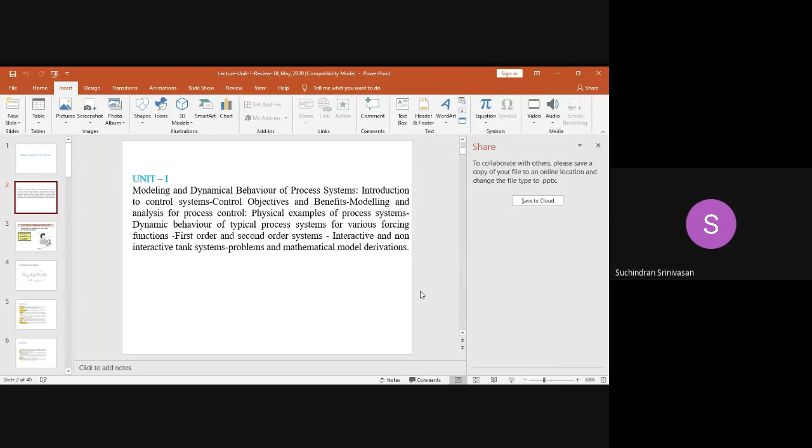So in the initial stage, we designed the mathematical model of a given system. Can you recall some of the mathematical principles we employed in building the mathematical models? So we used the energy balance equation. That's good. And then? Mass balance equations. Energy balance, mass balance equations. Yes, if it's an energy intensive process, we employed the energy balance equation.

If it is mass based systems like a liquid tank level system and all, we employed mass balance equations. So then we arrived at a particular differential equation, I hope you can recall that. Mostly we learned only two different kinds of differential equations: number one is the first order differential equation, number two is the second order differential equation. We didn't learn anything more than that.

So for first order differential equations, we learned thermometer and single tank systems. And for second order differential equations, we learned something like two tanks connected in cascade mode. So that's what we learned. We also studied how to analyze the behavior or response of systems for given input signals. So with that in mind, let us now move ahead and try to understand some basic concepts, starting with what is the feedback system.

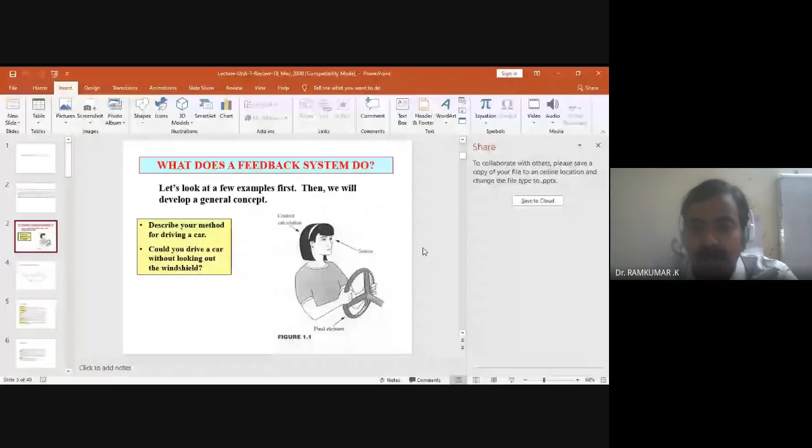And the sensing part is the eyes, and the final control element is going to be the steering wheel, or even the accelerator pedal can also be called a final control element. If you are looking for a velocity-based control mechanism, to control the speed of the vehicle, the accelerator pedal can be the final control element. If you want to move right or left, you rotate the steering wheel accordingly and take appropriate control actions based on the requirements. So it's basically a basic feedback control mechanism that employs a sensor powerfully. The sensing element is so vital here, and with its help only we are going to take appropriate control actions. So that's what we learned.

So if you think about a feedback control system, you can always mathematically put it in the form of a block diagrammatic representation. Most of you already studied a feedback control course last semester, so you're quite familiar with this closed loop feedback control mechanism, wherein you have a process and a measurement point. In this case, the process may be a cruise car, and you are measuring the velocity. Then with the help of a control mechanism, you will be accelerating, decelerating, or applying the brake. So the final control element is something by using which you bring about a change in the process. You are going to influence the present status of the process with the help of the final control element, and the controlled variable is key.

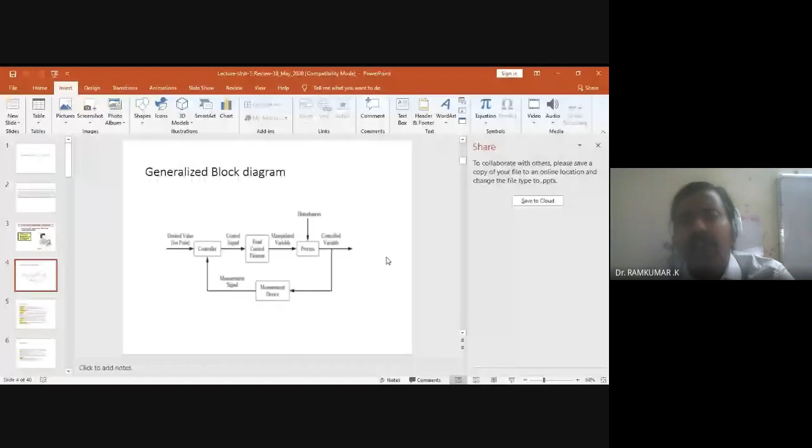For most of you who are going to review the entire subject again, try to concentrate on some basic feedback closed loop diagrams. You can just type in Google 'closed loop case studies or examples' and you will get a lot of real life examples. It may be a cruise car, a flight mechanism, a satellite control, or a very simple heater mechanism or heat exchanger system. You can see a lot of examples on Google. Familiarize yourself with the various kinds of variables I'm talking about here, like if I ask you, what is a controlled variable? What is a manipulated variable?

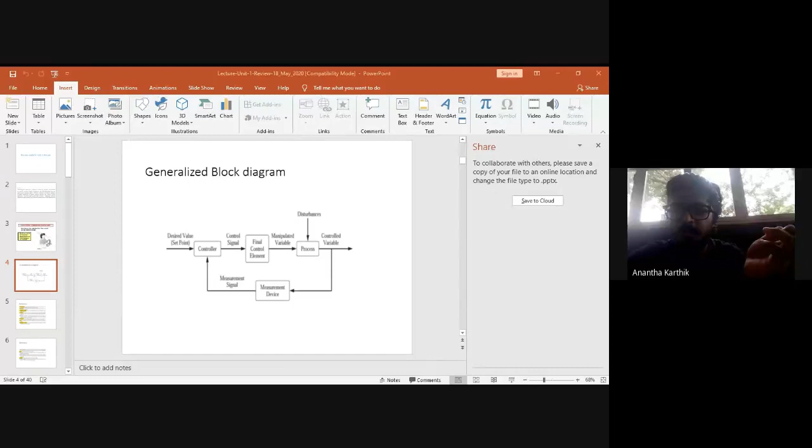It seems some people are unable to join the session. Give me a minute. Totally there are 55, 56 guys joining, still joining. Darshana has left the meeting, ask her to join again. I think most of you are there, 56 guys are there. For some people, the invite link is not working, that's the problem it seems. They need to come to this classroom, which I have already shared. Classroom, I will share that same link in the group. In this classroom, they just have to simply click the ID link I have given. I'll share that link to them. That's not the problem, sir, they are using their normal mail ID in Meet. They have to use SASTRA mail, that is not allowed. They need to come to the SASTRA mail and enter my class. This class I have already given to third year B section. For Praveen also the same problem persisted, but just now he sorted that out.

You guys are getting keen on this online mode, very good, very good, I'm very happy. But what about my audibility and all, is it clear to you all? Yes sir, it's clear sir, the voice is perfectly clear and audible. Okay fine, in between if you have any doubts, you can stop me and raise your doubt.

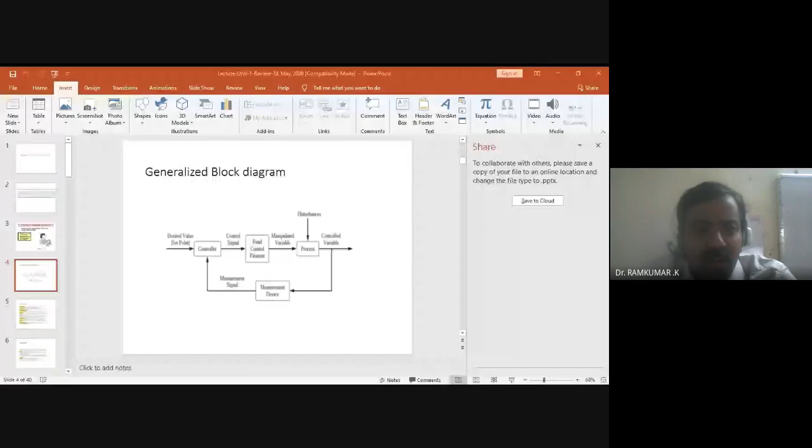So that you'll be in tune with whatever I'm trying to convey to you. At the end of the day, learning is important, so whatever I want to convey, I want to convey, and you should be in a position to give me the required feedback. Otherwise the control systems will not work, so required feedback is essential. So don't interrupt unless you have a genuine doubt, but if you have a doubt, please interrupt. Now, can you see the slides?

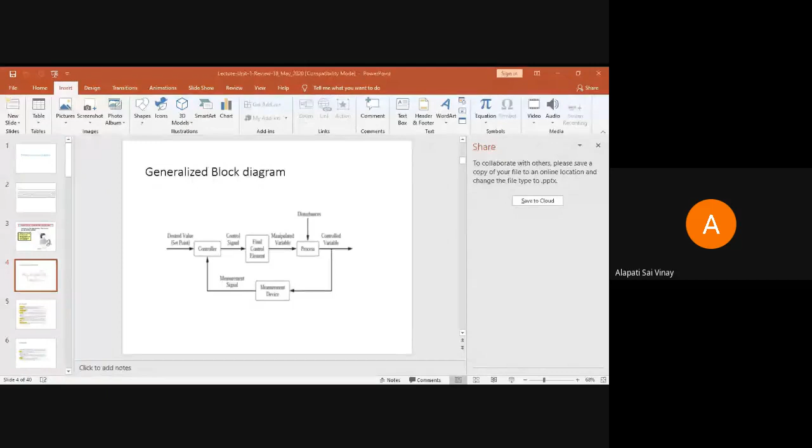For example, if somebody is asking you, what do you mean by disturbances in a system? Can anybody answer? Don't look at the definition there in the slide. Can you give your own answer? What do you understand by the term disturbances? So anything that's hindering the process, or not necessarily a process, anything that's hindering any flow of movement, that's a disturbance. That's right.

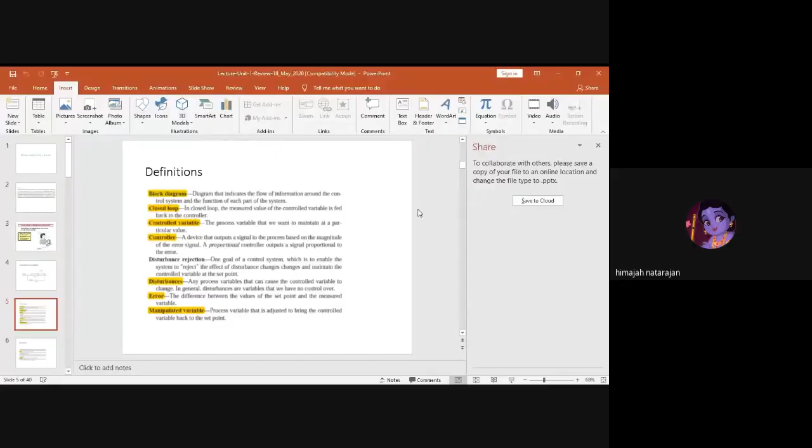For example, you are driving a car. You are accelerating the car. What do you think will be your disturbance? Suchindran? Sir, the wind resistance, the road friction. Yeah, that's right. The road friction, wind resistance, all these. See, for example, when you are accelerating in a very ideal condition, the amount of pressure that you will be exerting on that accelerator pedal, which you would have been trained to do.

So if you are pressing it and it's going at 70 kilometers per hour, suddenly, because of the wind, what happens? For the same amount of pressure you are pressing on that accelerator, the speed may reduce. So in that case, the controller has to take corrective control action so that you'll be pressing it more to get the required speed. 70 kilometers per hour you want to travel, now it has got reduced to 65 because of the wind.

That's a disturbance. So somehow or other, we need to eliminate the effect of disturbances over the system, and a controller should do that effectively. So disturbance elimination is one of the key properties of any control system. Can somebody tell me what are the key control objectives of a system? So one of the major control objectives is safety, sir. As we learned, of the 9 different objectives, safety is one of the major things.

And then we see the feasibility, its production rate, quality, profit. Economic viability, sir. Who is that? Deepak, sir. Quality, yes, very good, profit, economic viability. What do you mean by economic viability, Deepak? So if you're spending a little bit of money on your system, you should be able to have an equivalent output for it. You should not spend too much for a system that you can run in a very cheap amount, sir.

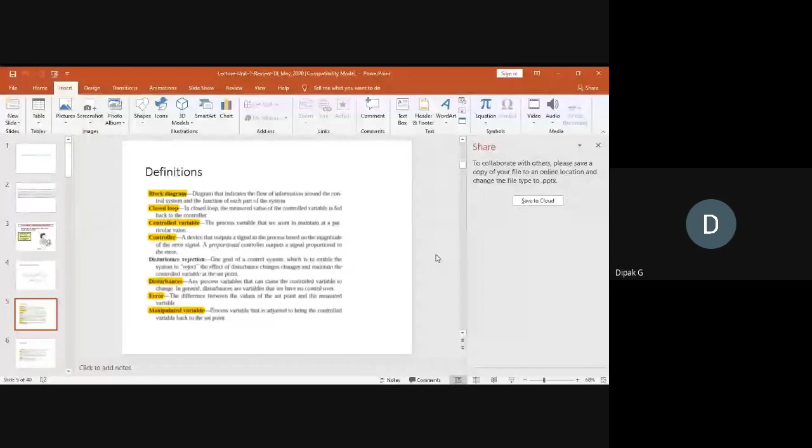Kumar? Dipak refers to the profit, I think, the profit margin, right? Not necessarily, sir. In cases where we have to spend over 100 liters of fuel to burn something, if we are able to do it in 50 liters, we'll be saving fossil fuel as well as money. So both will be working simultaneously. Okay, that's good. Apart from that, the main control objective is the safety requirements, environmental safety as well as equipment safety. That is the primary objective.

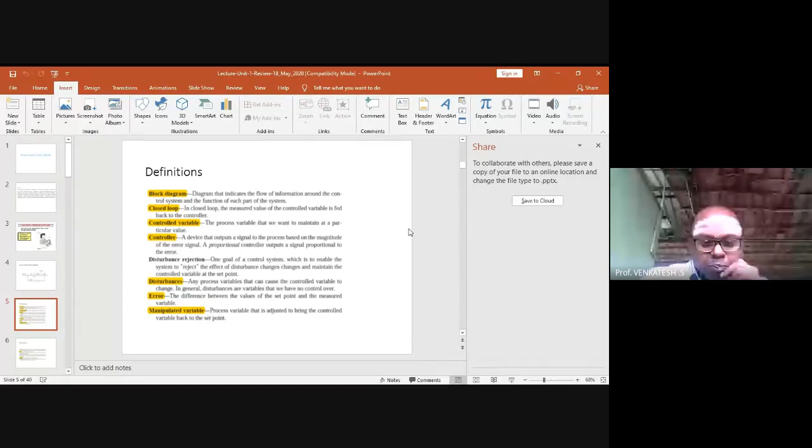Okay, proceed, Ramkumar sir. So some of the key points that you need to keep in mind when you are designing any control mechanism: always ask this fundamental question. What am I trying to control in my process, in my system? What are all the variables that I am interested in controlling? Number one question. Then how do I control that? What are all the various manipulated variables involved, and what are all the other variables involved?

So what particular manipulated variable, if I manipulate it, will have an influence over the controlled variable? That you should be in a position to identify. Along with that, you should keep posing questions like, what kind of set point tracking mechanism am I interested in? Am I interested in tracking my set point in a very perfect manner, or is some kind of error, some kind of tolerance allowed? What about the transient response?

What about the steady state response? So set point tracking is a key problem when it comes to any control mechanism. At the same point, you should also ask the question, what kind of disturbances are acting over my system, and how do I eliminate that with the help of my controller? So disturbance elimination and set point tracking, these two are among the key ideas related to control systems.

Along with that, you should also think about something called stability. Okay, so most of you have studied closed loop systems, transfer functions and all. So you should be in a position to know that by knowing where the closed loop poles are located in the S-plane, you can imagine the kind of stability, the kind of transient response, the kind of steady state response the system can provide. So this idea is quite important.

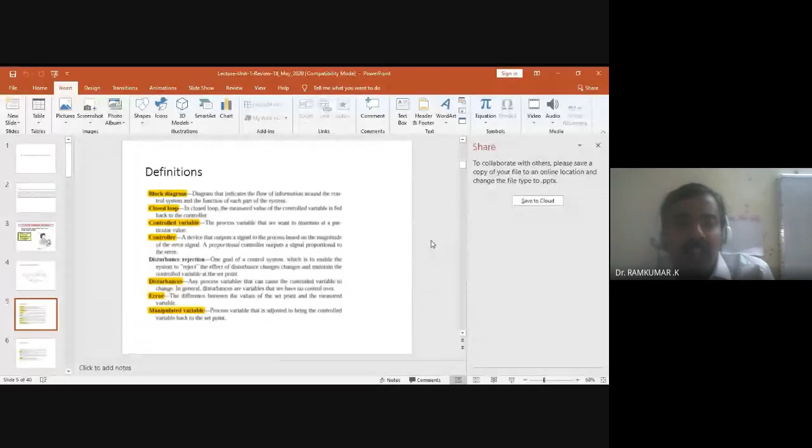So when you go back to your drawing room and learn all these things again, try to spend some time posing these kinds of relevant questions. What about the location of the poles in my system? Are the poles properly located or not? If not, how can I make them move from that particular position? These are all things you should study. So that is the first unit. You should also clearly understand where control is done.

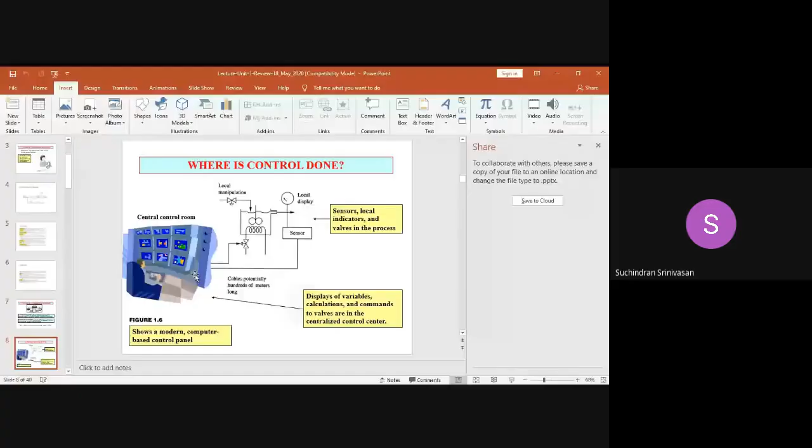And then it's breaking up. Yeah, now it's connected, I think. All right? Yes, all right. Fine. I received a call on my phone, that's why it's getting disconnected. But all right, now I switched it off.

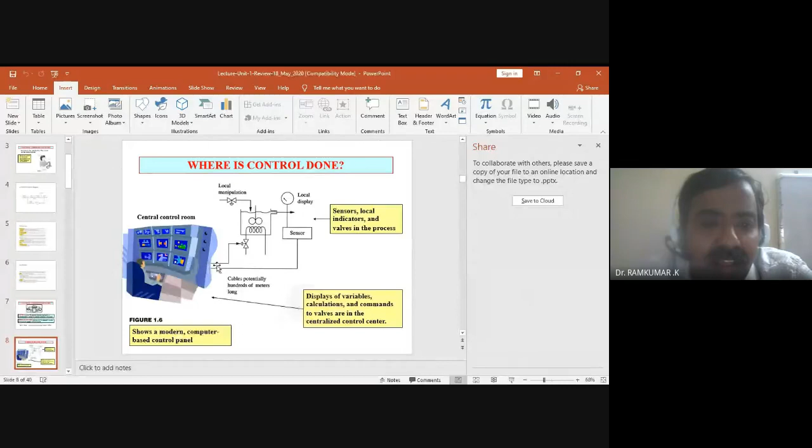So now the central computer will be receiving the sensing signal, and based on this input, the controller has to take an appropriate control action. In the control room there will be computers and PLC-based controllers. Distributed control mechanisms will take a corrective control action, which will be given to a control valve. This control valve will adjust the amount of fuel entering the heating mechanism, and thereby the temperature will be maintained.

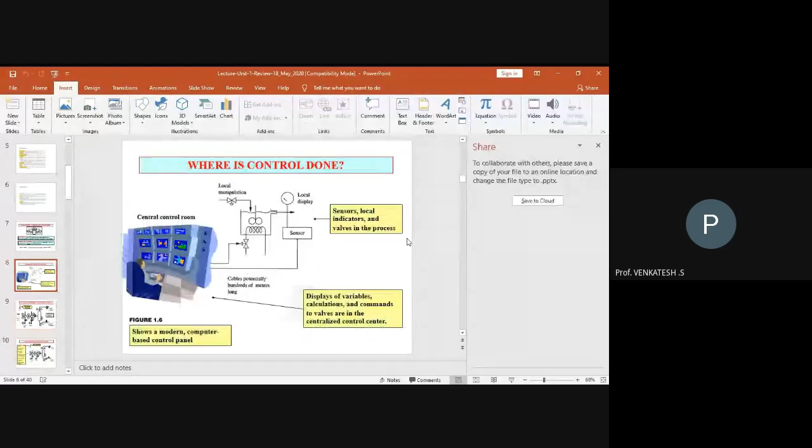Hello, okay. Are you able to hear me? Venkatesh, can you see the slides? Hello, is it audible? Slides are clear to you? Ramkumar, yeah, you are audible to me. Sir, is it audible to you? Can you see the slides? Yes, sir, we can see the slides. Okay, very good. You can hear my voice also. Good.

Okay, so now look at this. We are going to take one simple example to understand the various control objectives: a process called the flash separation process. Can any one of you in this class recall what we learned in this slide?

Venkatesh, you are not hearing me. You mute it, Venkatesh. The rest of them are hearing. You mute it.

Okay, so can any one of you try to explain what the flash separation process is all about? Anybody? Just give it a try. Sir, in the flash separation process, for example, petroleum fuels have boiling points at different temperatures. Excellent. So you can refine multiple different elements by boiling them at separate points, so that when the vapor comes, you can separate them and get the components refined, sir.

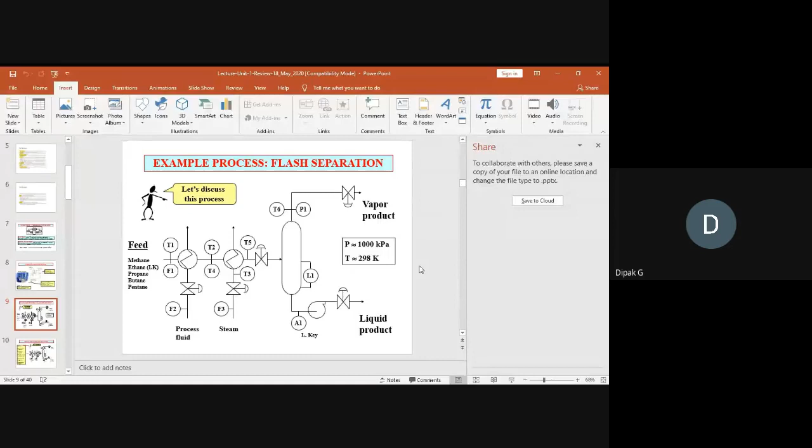Okay, excellent. So as he has mentioned clearly, we have, for example, two different chemicals mixed together, maybe methanol and water. Methanol boils at, let us imagine, 70 degrees centigrade, and water at 100 degrees. So when both come to this point, after two heat exchangers supplying some amount of heat, the one with the lower boiling point, 70 degrees centigrade, is going to boil quickly and evaporate.

And you will be collecting it as a top product. And the higher boiling point stream of the mixture is going to be collected as a bottom product. It's called liquid product, and this is going to be called vapor product. So you're going to maintain some temperature here, and thereby you'll be separating two different kinds of chemicals.

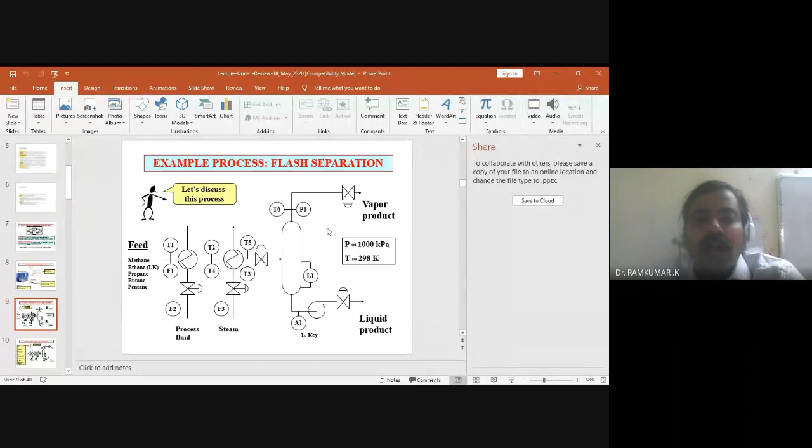So in this process, we are interested in employing the control objectives. So what's the first one? Can you recall this? I hope most of you can recall this. Safety is key. Recently, you might have noticed from the newspaper that in Visakhapatnam there was a big chemical plant disaster. Yes, sir, a gas leak. Yeah, gas leak. So safety is key.

And one more thing, Ramkumar sir. Very recently in our Tamil Nadu NLC thermal power station 2, there was a disaster. Actually, 8 were injured, and later on 1 or 2 died. One of our classmates, Varsha, is residing in Neyveli. She asked me on that day what the reason for that disaster was, whether it was a control system failure or something like that.

And I told her in the class itself that a lot of frequent maintenance is essential. Frequently the plant will be shut down for doing the maintenance. So everything should be done. The control system should be proper. Everything. That may be the reason, I told her.

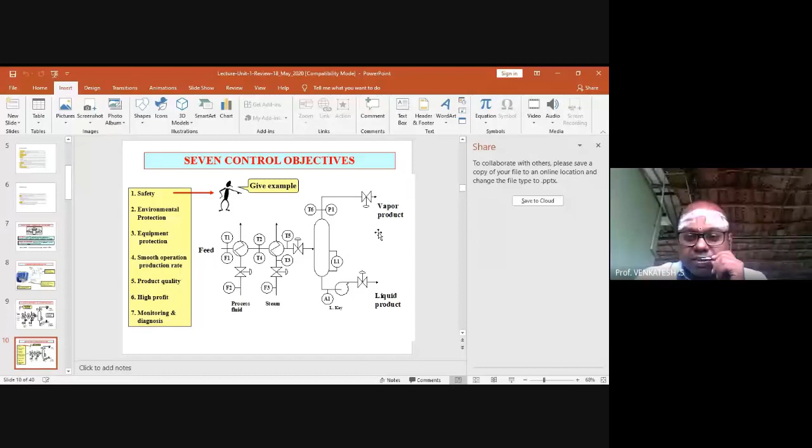Okay. Varsha, are you there? Varsha? Varsha, are you there? Can you just tell me what you have learned? Okay, fine.

So now look at this case. In this case, high pressure in the drum is dangerous. So naturally, we need to measure the pressure in the drum, and with the help of a pressure controller, you'll be controlling this valve, and this valve will be adjusted in such a fashion that the required pressure will be maintained within this system. So the control objective of the pressure controller is very clear. Safety is ensured. So the pressure controller will take care of safety.

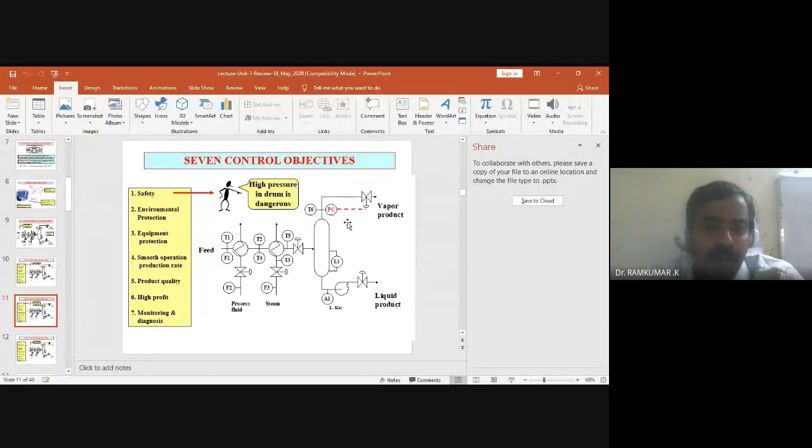What about environmental protection? If you look at this case, there will be some flare emitting some kind of poisonous gases. So somehow we need to maintain the quality of the pollutant that's going to come out of this. So we'll be transferring the gases coming out of this flash separator to some other place where we can separate some of the pollutant from it.

Then you have equipment protection. So how do we ensure equipment protection? Who can tell that? What do you mean by equipment protection in this case? Sir, usually to prevent corrosion, they coat it. They do zinc galvanization, so it can handle high pressure and heat, sir. And sensors are used to make sure it doesn't vary from the parameters.

That's excellent. But the key point is we are thinking of control objectives. What you are saying is a design objective. When the process is being designed, they'll be doing all this coating. But once the process is designed, the next stage is control mechanisms. In this flash separation process, if the level of the bottom product goes down beyond a certain limit, some pump may get damaged. So we need to maintain the level in the bottom product.

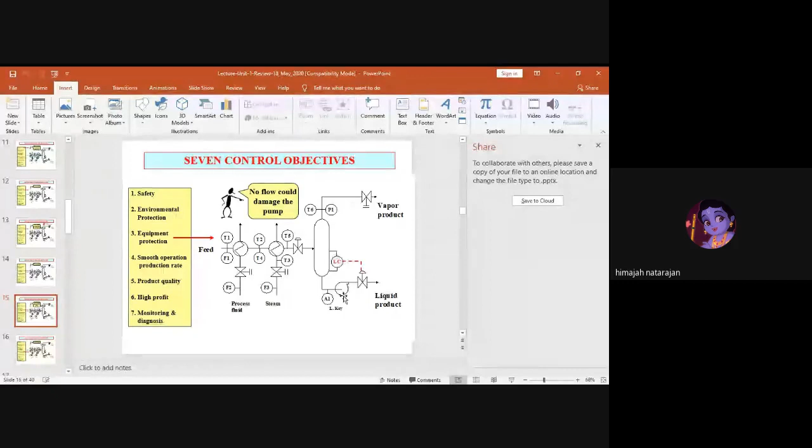Which equipment? Anybody? Equipment in which the liquid is stored. No. The equipment pump. Pump is the key. Okay, the pump will get damaged when you are going to operate it with a very low level. The level is low, there will be the differential pressure. You'll be getting into a problem. There will be a failure. The pump may get damaged completely because of the low level.

So even you can test it in your house also. If you have an overhead tank, when you are going to run the pump without any liquid in the tank, what will happen? It may get damaged. Heat energy will get accumulated over a period of time. Pump may get damaged. So it is essential for you to maintain the level in the tank.

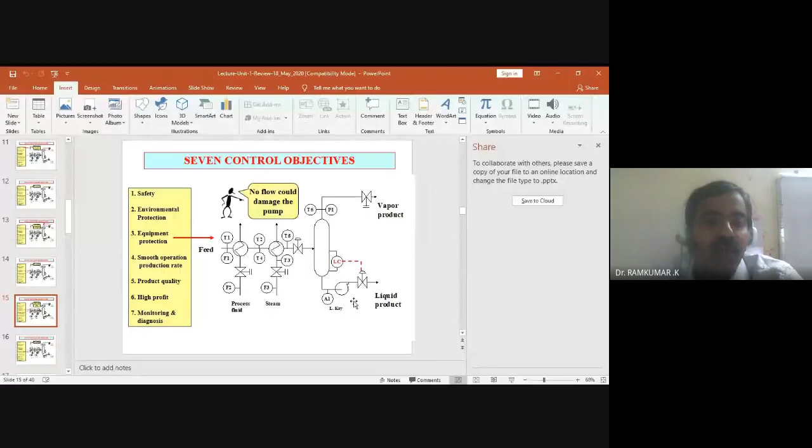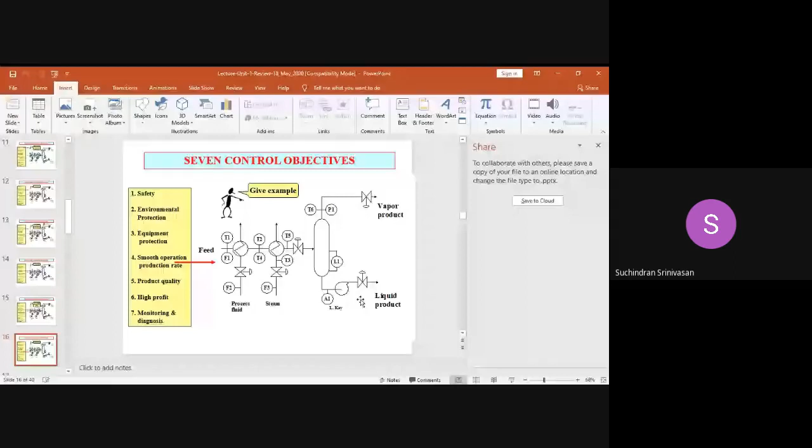So smooth production rate. Can somebody tell me what is smooth operation production rate? Can you recall? Anybody? Just give a try. So the process occurs without any hindrance to it, sir. It just continues in a proper flow. Yeah, smooth. Normally, the final end product is what we are normally interested in.

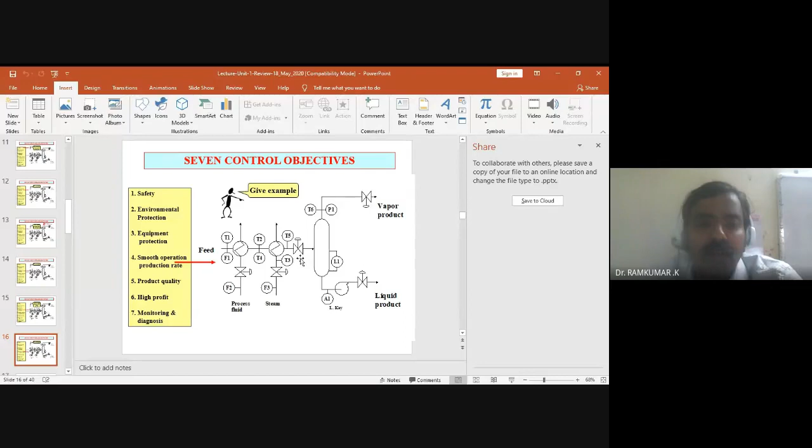Every day, for example, you are producing some 1,000 liters of a vapor product. Imagine. You should maintain it in a very smooth operational manner. The production rate should not get disturbed. So for that, somehow or other, you need to maintain the inlet flow rate. You should keep on feeding the required amount of that combination of chemicals into that separation process in a very continuous manner. That smooth operation should be ensured because you'll be maintaining the flow rate here. The flow rate can be controlled.

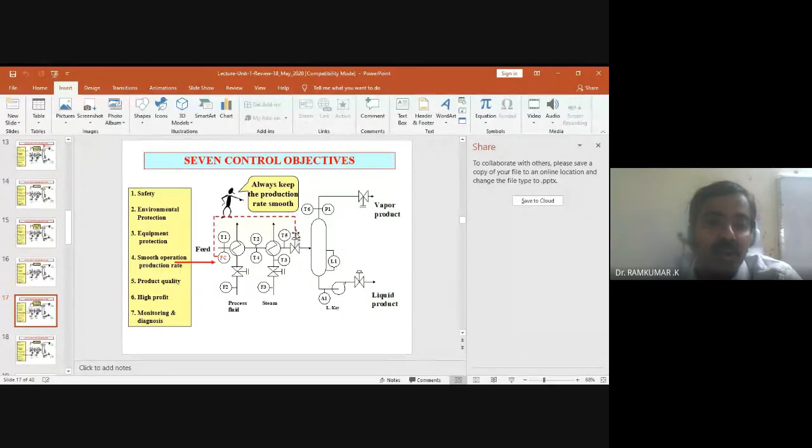So product quality is also important. The final vapor product, the liquid product. What's the concentration of it? What is the concentration of the vapor product, for example, methanol? What is the vapor product, liquid product, water? What is the quality of it? Somewhere you need to ensure the product quality also. How do you do it? You measure the quality with the help of a quality measuring sensor and take a corrective control action.

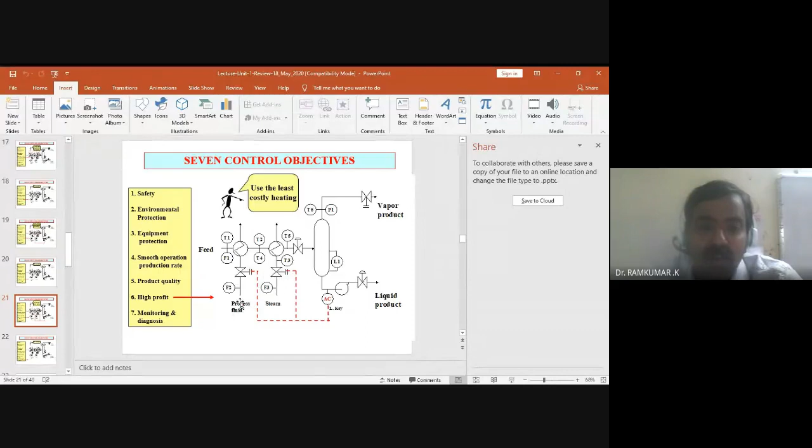So then we have very high profit. For example, if you are looking for high profit, what do you do? You can combine, for example, recycle. This is a heat exchanging unit wherein you are using some amount of heat generated from a process fluid. So it's more like a recycling happening here. You can use that process fluid for again heating your feed. So in that case, you are increasing the profit margin. Energy is related to cost. Cost can be in terms of money. So you can measure the composition and you can take corrective control actions. High profit is another motive for control objectives.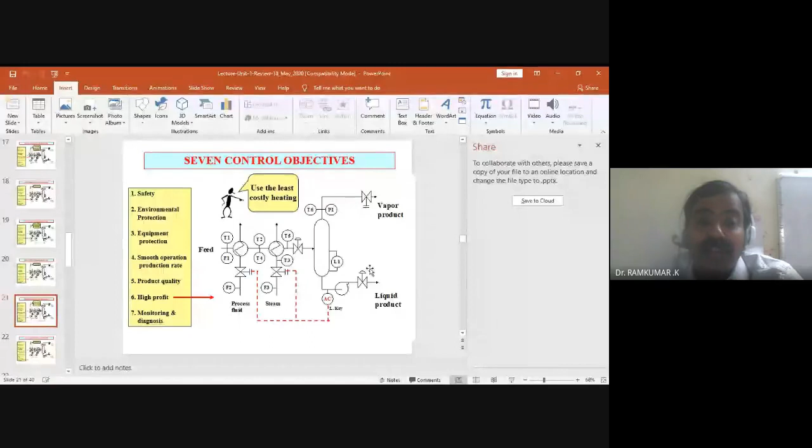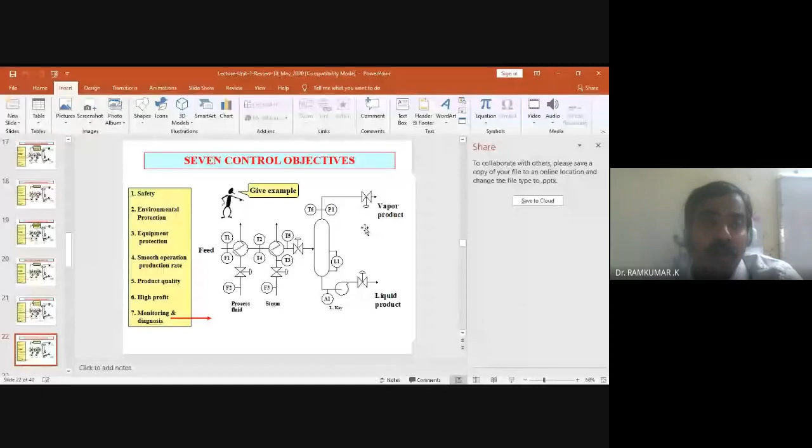Monitoring and diagnosis. You can measure some variables and you can study how the variables are varying with respect to time, and whether they are maintained within some particular values or exceeding the limit or not. All these you can check. So these are some of the 7 control objectives we learned. Again, you can go back to the slides and try to understand.

Then we started learning about something called the transfer function models, the first order system, transfer function models and all. I hope you can recall. So what is that we are interested in? Mathematical model. Can somebody tell me why do you require a transfer function based mathematical model? What are we going to do with that model? So the mathematical model will serve as the basis for construction, sir. Okay. Anybody else?

What about Santosh? Sir, in order to actually simulate something, we need to know how it works. So we create a mathematical model so that we can have a rough estimate of how the system will actually be working. Based on that, we can create a real-time system. Okay, that's right, Santosh. Very good.

But is there some other use for it? As a control engineer, you are looking at that model. What do you normally expect? As a control design engineer, what do you normally expect from a mathematical model? Anybody else?

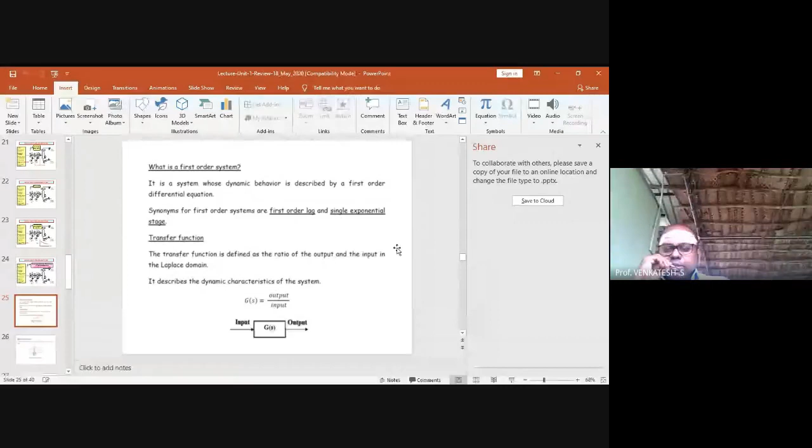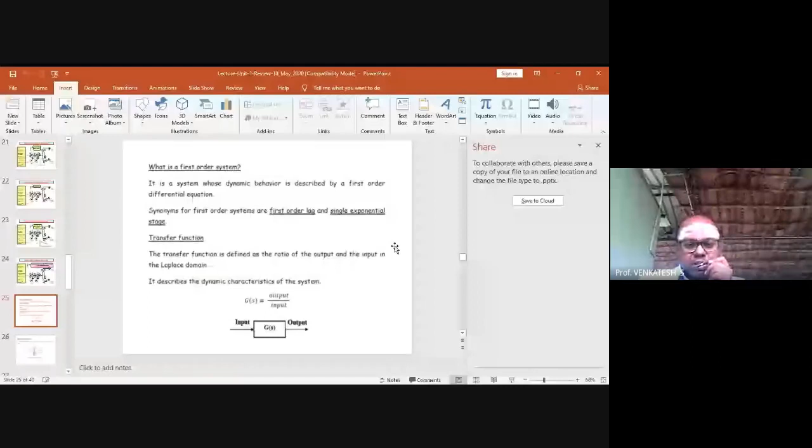Sir, to establish proper set point tracking, sir. Okay. So with the help of the model, how do you achieve that? See, Sir is asking about the model. By implementing controllers, transfer function model. Mathematical model. In what way is it useful for designing the controller? That's what Sir is asking. Yeah. And the transfer function model, what does it refer to? Venkatramanan, why do you need a model? Why do we need a model?

In order to have a mathematical model of a plant system, we need to have a model, sir, to make sure everything is in order. Because as we already saw in the control objectives, in order to control, we need to know what we are dealing with, so we create a model. Using that model, we can know the output and input, what they are going to be, and then we can control it. That's where the transfer function comes in. See, you have to use the correct terms, Suchindran.

We need to study the dynamic behavior. Okay, see, we learned about many dynamic behaviors. What about transient response, steady state behavior? What will happen when time t tends to infinity? What exactly is the final value theorem all about? So all these you have studied. For doing all these, you require a mathematical model.

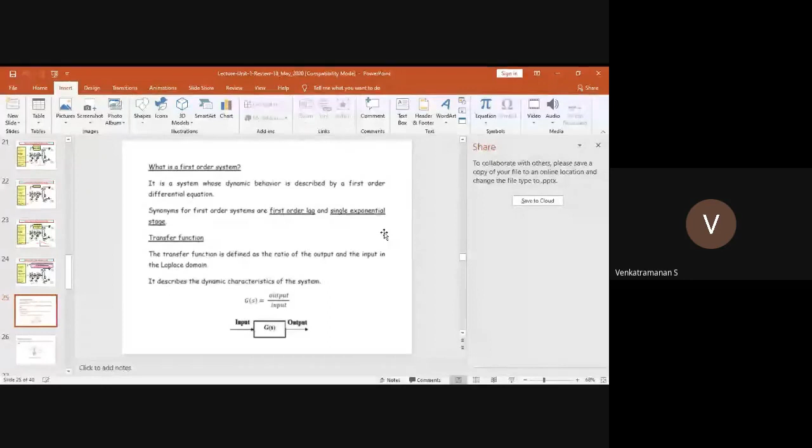So basically, we are moving away from a differential equation model to a frequency response based, Laplace transformation based model. Why do we require a Laplace transformation based model instead of a time domain based model? Why do we shift our focus from time domain to frequency domain? Anybody? Is it so we can analyze big systems easily? Sir, in the time domain, we cannot wait for infinite time to analyze the system, sir. Whereas in frequency domain, we can vary the frequency from 0 to infinity and analyze the system. So even in frequency, you cannot go in for infinite frequencies.

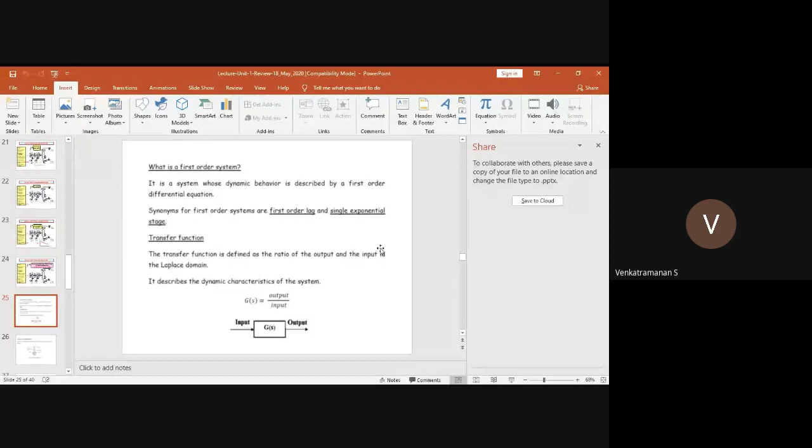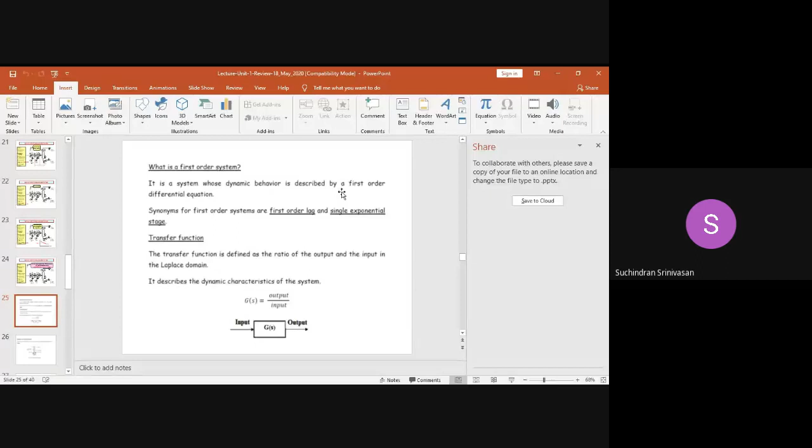Okay. So in the time domain, the key point is, Venkatramanan, what are you trying to convey? Can you repeat what you said? We cannot wait for infinite time to see the response of the system, sir. Okay, so steady state behavior analysis, when time t tends to infinity, will be a problem is what you are trying to convey. Yes, sir. In frequency domain, instead of waiting for t tending to infinity, we can find s tends to 0, which is the final value theorem. Final value theorem is what you are saying. Okay.

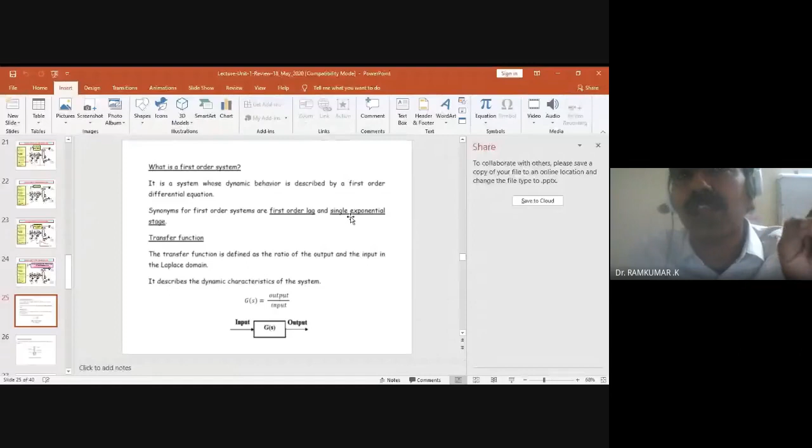But the key point that you have to understand, Susindran and everyone, is we are interested in converting complex differential equations into algebraic equations. That's the key. If you look at transfer function models, the numerator and denominator are both algebraic polynomial expressions. But differential equations are calculus-based and complex. Finding solutions for a fifth order differential equation is much more complex than finding the algebraic solutions for a fifth order polynomial. That's why we go for this kind of transformation. Number one.

Number two, any other point? There is a one-to-one kind of transformation. A mapping exists between time domain to frequency domain and frequency domain to time domain. So it's always easier to convert a calculus-based differential equation format to algebraic format, and once again you can come back with the inverse Laplace transformation.

But the key point, why do we require a model, is we can give various forcing signals. Without giving different forcing signals to a real-world system, we can give them to a mathematical model and study the response quite comfortably. Like some standard test signals you might have studied. Can you recall some test signals? We've got the unit impulse, step, ramp. Yeah, ramp and sinusoidal. Very good.

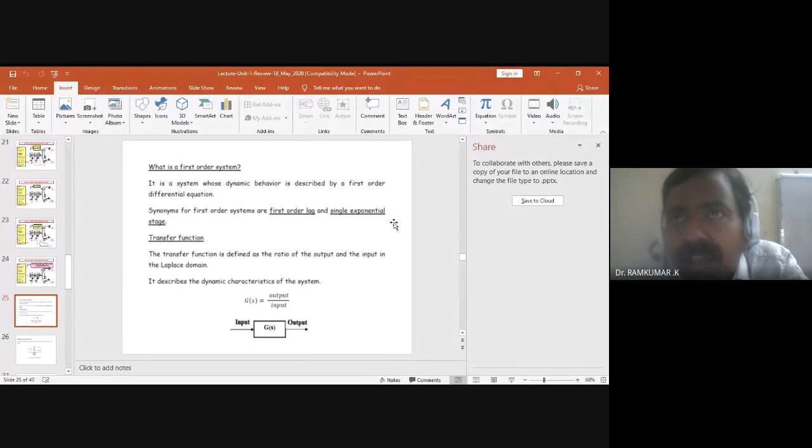In fact, with impulse signals, you can generate any signal in the world as a combination of impulse signals. The convolution you studied in signals and systems, I hope you can recall. Any signal can be decomposed into a number of impulses. So by knowing the impulse response, it's feasible to know the entire behavior of the system under linear conditions. It's applicable only for linear time invariant systems. So transfer functions are basically nothing but impulse responses.

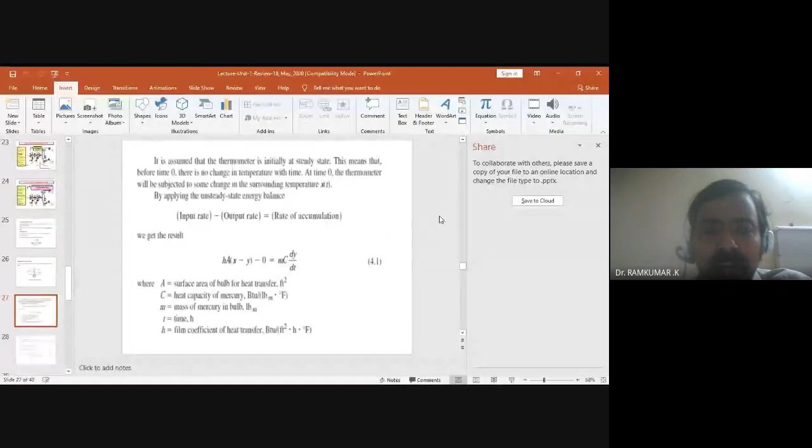Now we also learned about first order systems, where we discussed something like a mercury thermometer, where we ended up with an expression like this. Who can explain this expression? Anybody? Input rate minus output rate is equal to rate of accumulation. What is the name of this equation? Energy balance equation. Yeah, what is it that you are trying to explain here?

Just look at this slide carefully and tell me what you are seeing here. It's the rate of accumulation in a storage tank, sir. In case of a tank which has an input... Tank, it is not a tank. Look carefully, the previous slide is a thermometer.

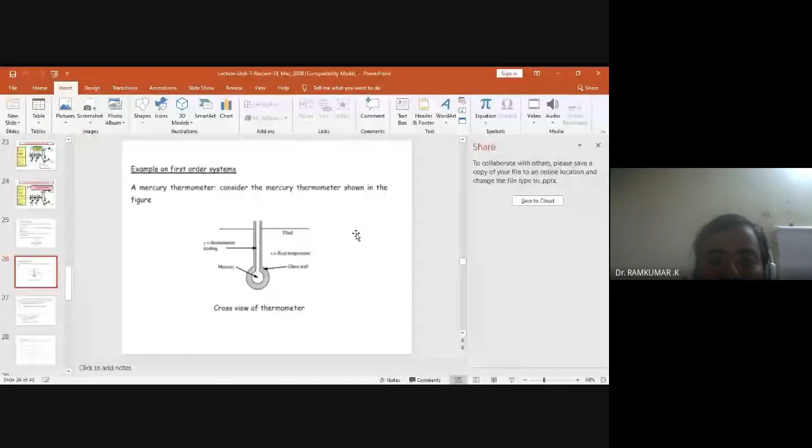We are not talking in terms of mass balance, we are talking in terms of energy balance. Whatever energy we have supplied in terms of heat is converted to volume, expansion of the mercury, exactly. Volume change, exactly. Good, Venkatraman, okay very good.

So if you look at this case, what is X here? X indicates the fluid temperature. You are going to keep your thermometer in a particular fluid, and the fluid temperature is given by X. And what is Y? That's the mercury temperature, the thermometer temperature it is indicating, whatever it is indicating. It's Y. The difference is what the temperature difference is all about.

So the X will be varying. For example, H is going to be what? The film coefficient of heat transfer. So some amount of heat is getting transferred from the fluid to the mercury, which is residing inside a glass bulb. Around it the film is also surrounding that glass bulb. So there is a film coefficient of heat transfer. Heat is getting transferred from the fluid to the mercury through the film coefficient.

Okay, and then the mercury is going to absorb the heat, that you call the heat capacity of the mercury. And there is something, heat transfer area is there, that is given by the area A, surface area of the bulb for heat transfer.

And M is, if the mass of the mercury is more, there will definitely be different thermometer readings. So mass of mercury is also there, and C is the heat capacity of the mercury, and dy by dt is how much the variation in the thermometer is happening because of the input change in temperature. So this is a fundamental differential equation that stems from the energy balance equation, not mass balance.

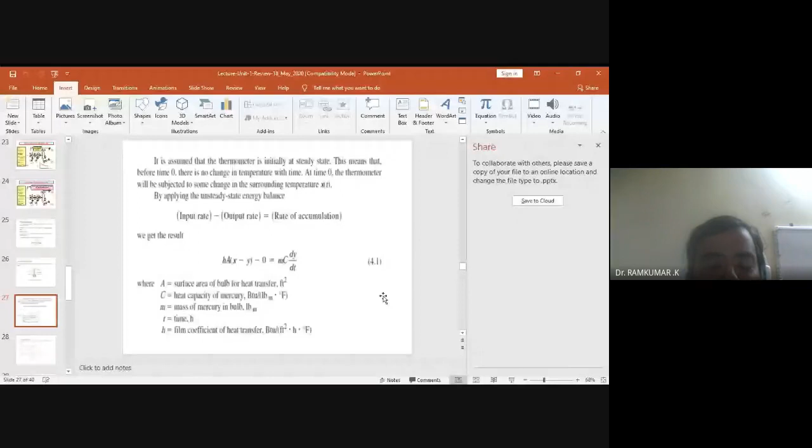Energy balance equation. So using this, easily you can build a first order equation, something like 1 by tau s plus 1. This is what we learned in the first unit. So you should know how to get a first order differential equation for a thermometer, and then start giving different input signals like A by S, in this case a step signal, and start studying how these systems will behave. For a step input response for a first order system, what kind of response will you be getting as output?

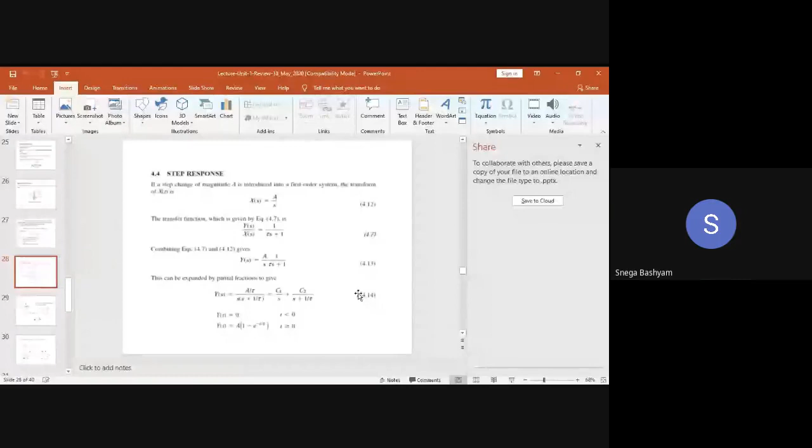What's the output response you'll be getting? Anybody in the class? What kind of response will you get for a first order system? If the input is a step, exponential response, sir. Who is that? Neha, sir. Neha, very good. So you will be getting an exponential response for a first order system.

In the first unit, when you are studying, I've been again and again telling you, you should be comfortable using Laplace transformation. So spend some time, I have shared some 4 or 5 videos in my Google Classroom for learning Laplace transformation. It may take around 30 to 40 minutes. If you go through those lectures, you can easily understand how to apply inverse Laplace transformation for different kinds of systems, whether first order, second order, first order with distinct roots, repeated roots, or a combination of complex conjugate roots. Easily you'll learn that from the videos I have uploaded in Google Classroom. So this you have to learn.

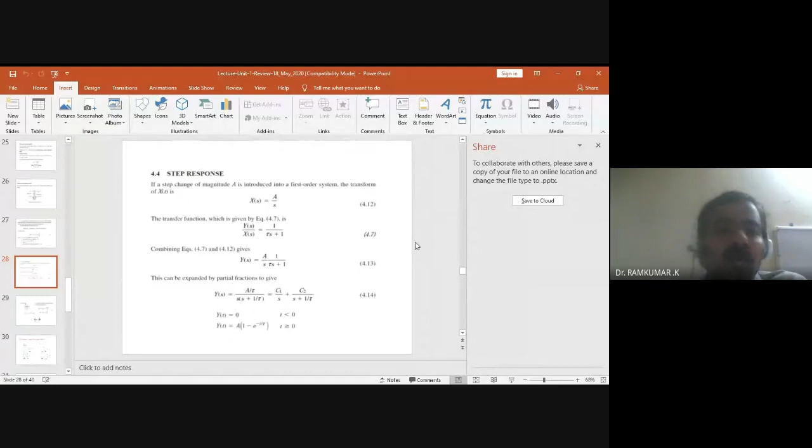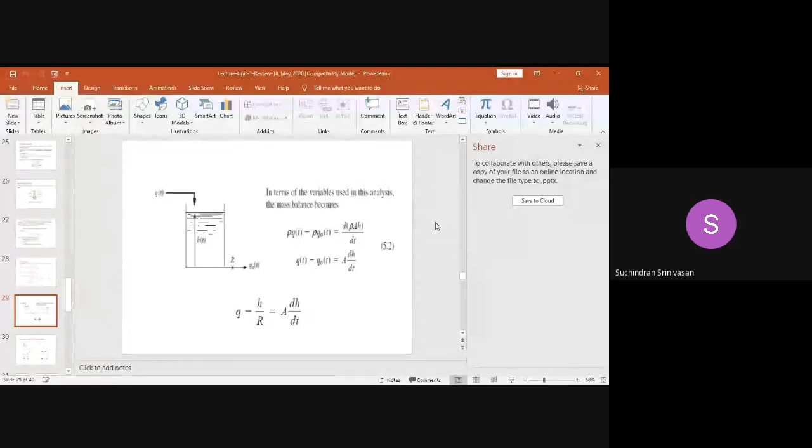Very good, excellent. So the key point here is the volumetric flow rate. Rho is the density, and density is mass per unit volume. Mass per unit volume multiplied by volumetric flow rate, what do you get? You get the mass.

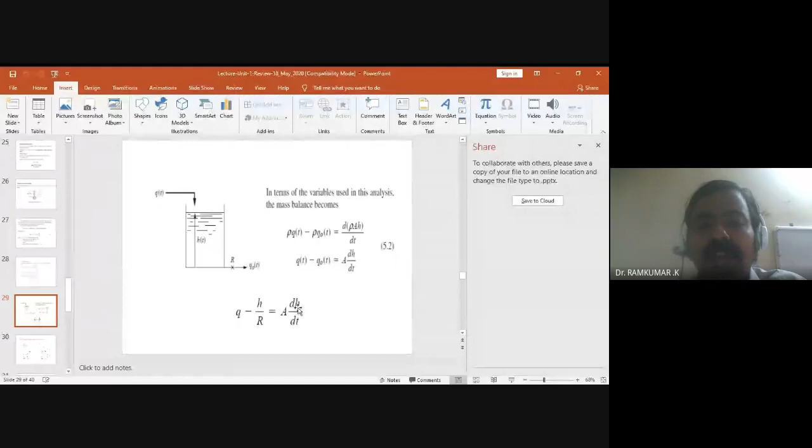So you can clearly see Qt minus Q naught T, A dH by dt, you'll be getting this expression. So if you look at the next slide, you can clearly see the difference between two different systems. In fact, we have discussed extensively about this particular system in our classroom.

So a first order single tank system with the output connected to a pump. What's the difference? Anybody give an answer. What is the difference between a single tank system connected with a pump at outlet, versus without a pump at outlet? Sir, if a pump is connected, output flow rate is constant.

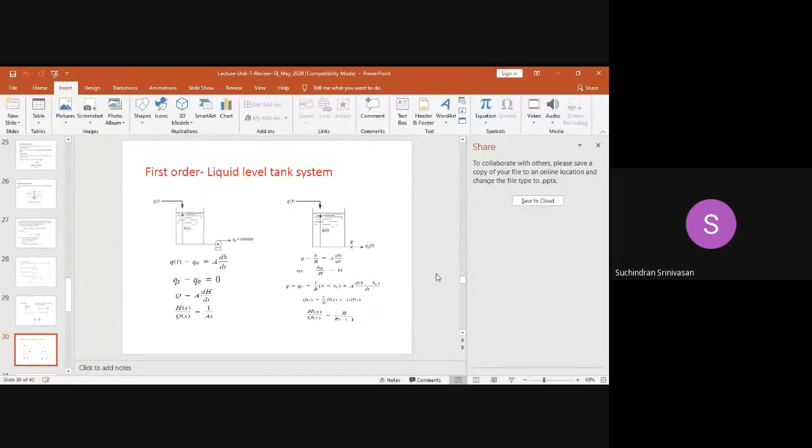Excellent, excellent, okay good, you are now recalling. I hope most of you are recalling what we have learned in the classroom. So then the differential equation, the Laplace transfer function equation will be completely different. 1 by AS, you will be getting it here. Here you will be getting R by tau s plus 1.

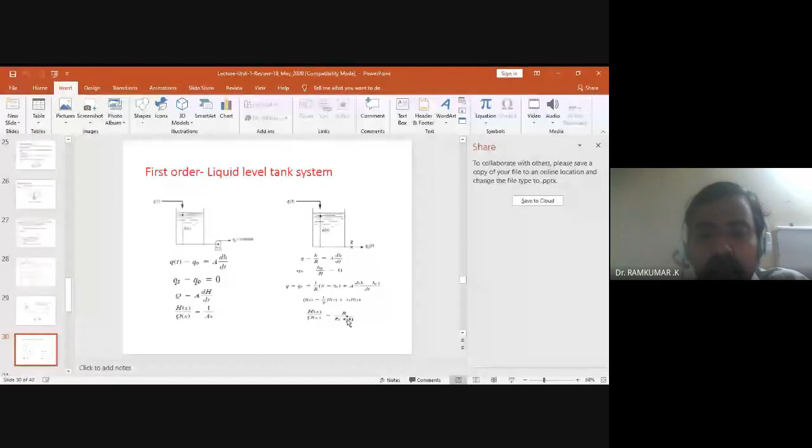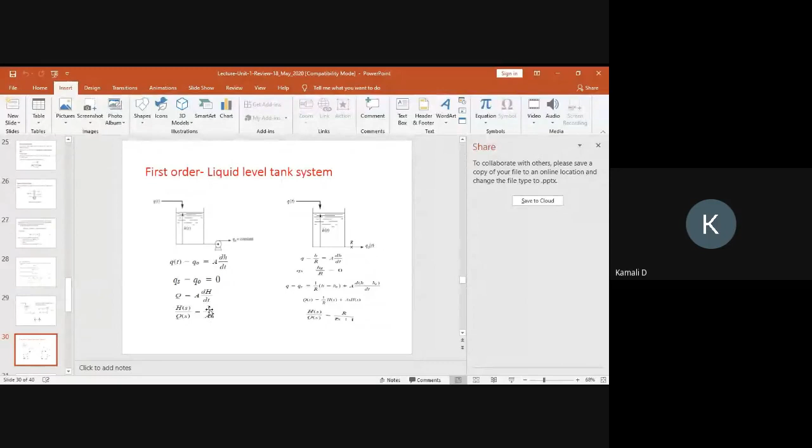If I say 1 by AS, what do you infer from this particular transfer function? 1 by S is what? Integration. 1 by AS, integrating system. It's an integrating system, excellent. Okay, so it's an integrating system.

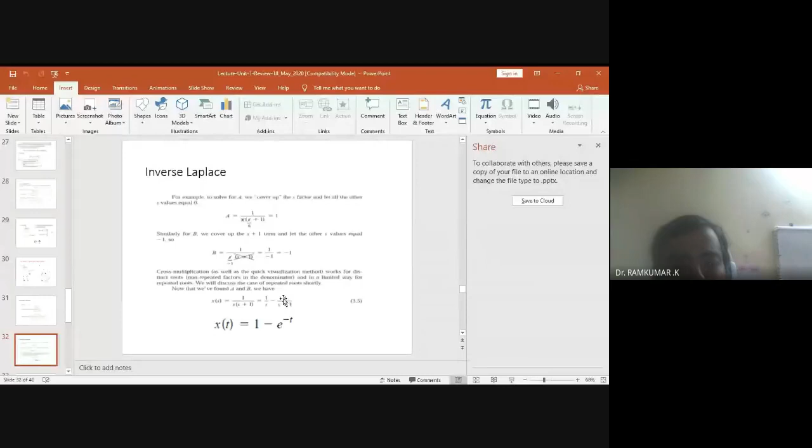That's what we learned. And so you should also learn something about the inverse Laplace transformation in the first unit. Spend some time on it. You should know how to apply the partial fractions approach and get the final results, in the time domain.

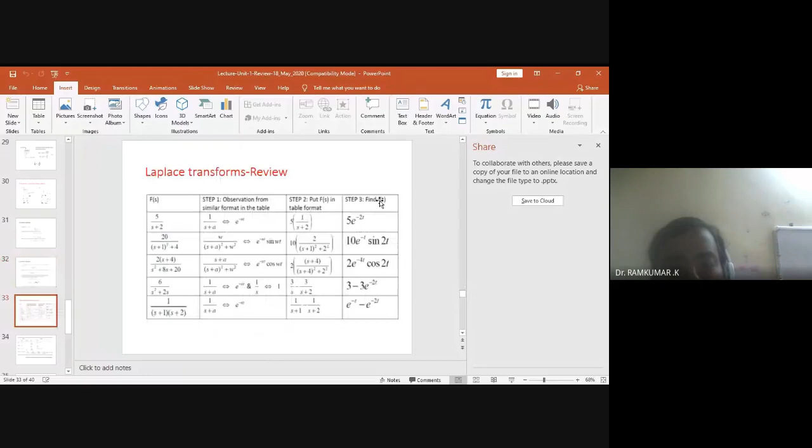That will help you to solve problems quite comfortably by going through this Laplace transformation thoroughly. Try to go through this slide also, this particular slide gives you a feel of what kind of responses you may get. For a first order system, if I apply a step signal, what will be the response? If I apply an impulse signal, what will be the response? If I apply a ramp, how will the response look like? Some standard signals, step, impulse, ramp, and sinusoid, you give and study how the output responses vary.

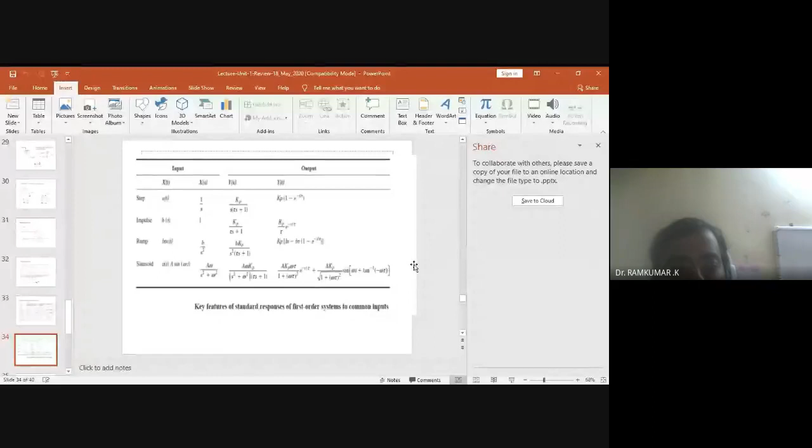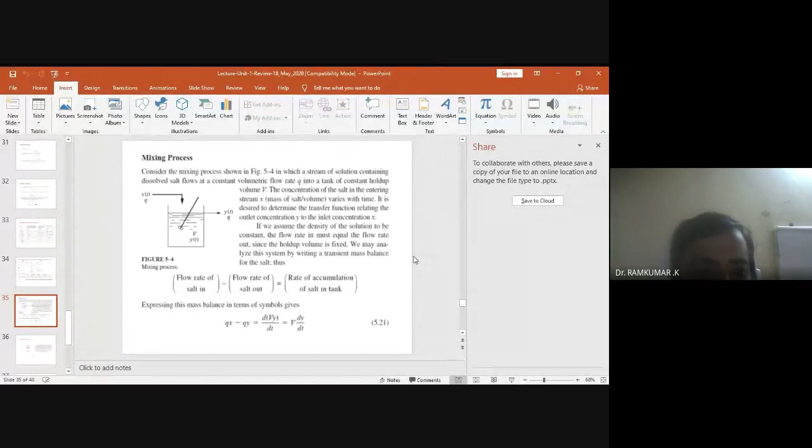So we also learned something like a mixing process. Again in this case, we employ the mass balance equation for the mixing process, and you end up with a first order process. In the same manner, the heating process. What do you do in the heating process?

Shabarish, are you there? Yes sir. Voice is not clear.

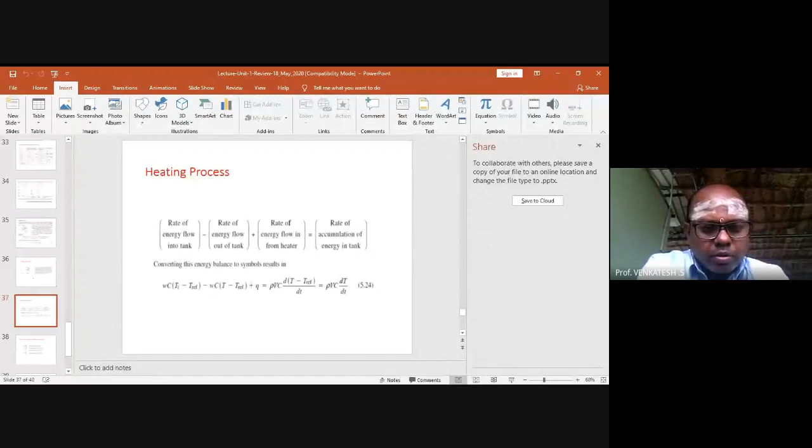This is the rate of energy flow into the tank. If you read this carefully, the tank is well mixed, and the temperature of the exiting stream is T. Now you are supplying additional heat energy using steam or electricity, given by Q. C indicates the specific heat capacity of that particular fluid, so that you should know.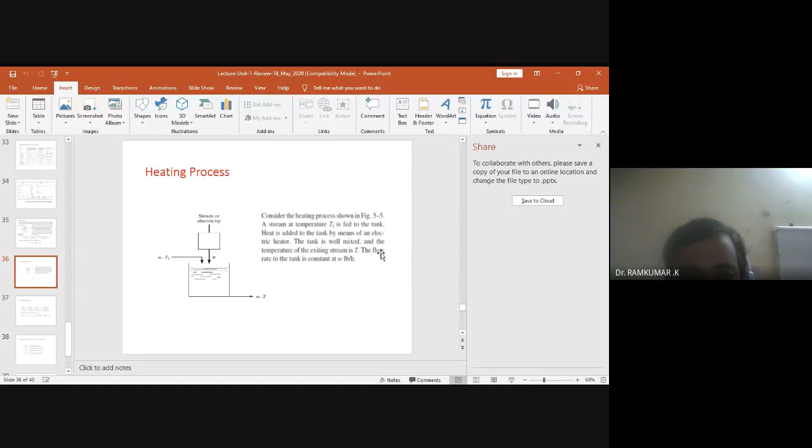W is the flow rate to the tank, constant at W, not volumetric, it's mass flow rate. Then this is the temperature difference. So if you know the amount of heat energy supplied, Q, and this difference, the rate of accumulation of energy in the tank is given by this expression, and you end up with a first order differential equation.

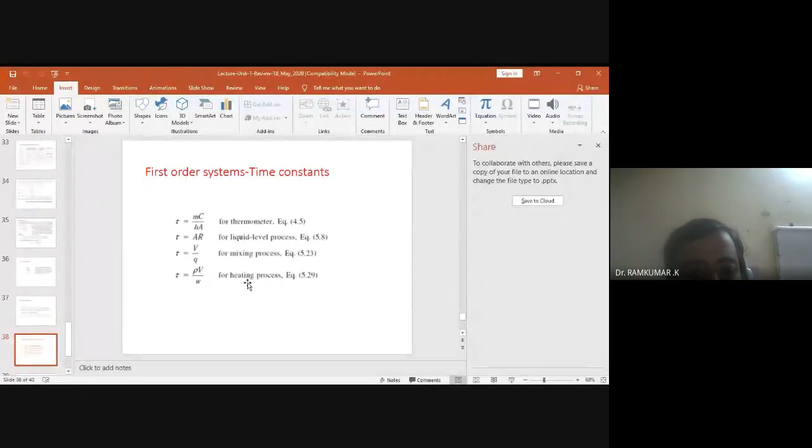You should know the time constant for all four processes: number 1, thermometer; number 2, liquid level process; number 3, mixing process; number 4, heating process. If you learn how to write differential equations for these four systems, along with non-interacting and interacting tank systems, you are through - the first unit is completely over.

You will be in a position to solve problems along with the Laplace transformation. Spend some time on the Laplace transformation, and you will be in a position to work out problems quite comfortably when it comes to interacting and non-interacting tanks.

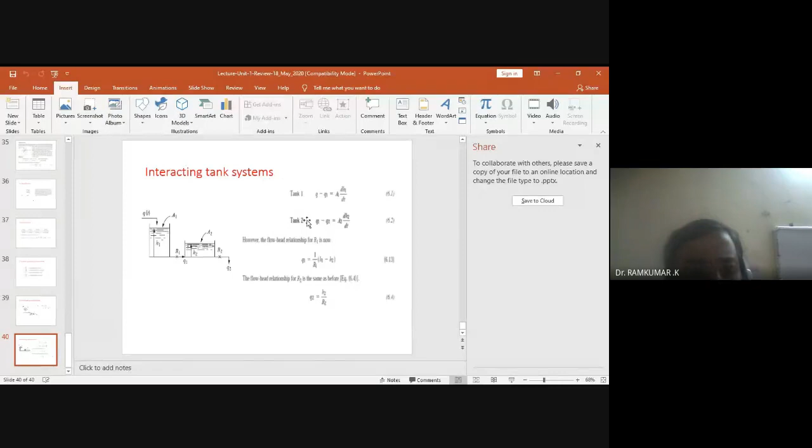We spent a lot of time on interacting and non-interacting tanks, derivation and problem solving in class - Venkatesh, you agree? Yeah, we worked out a lot of numerical examples in the first order system as well as second order interacting and non-interacting systems. Am I right, Venkatramanan, Varsha, can you agree? Yes sir, yes sir.